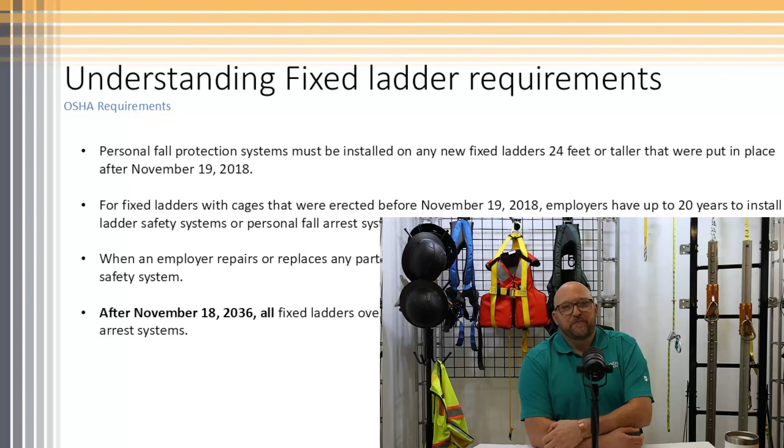So we'll go ahead and get started with ladder safety systems. So understanding the fixed ladder requirements is... well, Michael, could you make that a little bigger? Oh, yeah. Sorry. Having a little trouble seeing here.

Okay, there we go. So personal fall protection systems must be installed in any new fixed ladder that's 24 feet or taller, put in place after November 19th, 2018. Fixed ladders that have cages before that could still keep them on there, but you're given 20 years to install new systems. So what happened is that in 2018, OSHA came out and said all ladders 24 feet or higher have to have fall protection on them, and that fall protection is no longer a cage. It has to be a personal fall arrest system.

We offer several systems. We offer rail, in aluminum and stainless. We also offer cable systems in galvanized and stainless steel. We also do some random things where we put an anchor on there and put an SRL for shorter ladders.

Again, the standard calls out 24 feet. We obviously, as a fall protection company, realize that debilitating injuries start about 4 feet. General industry calls for 4 feet. Construction calls for 6 feet. So even though they're calling out 24 feet, we do recommend having them under 24 feet. Let's be honest, if you fall from 23 feet, it's still going to hurt.

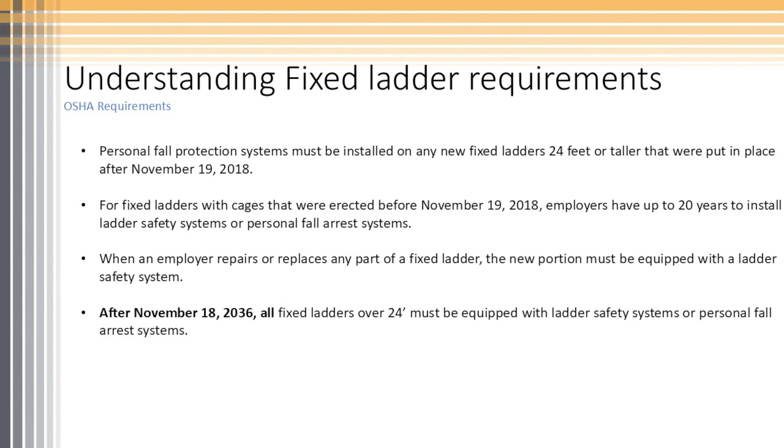This has caused a great deal of sales in our industry for people that are retrofitting and installing new ladders. So some of the places that we don't always think of for putting these in are shopping plazas, Home Depots, Lowe's, the gas station down on the corner. All these buildings are 30, 35 feet high, and almost all of them have HVAC on the roof. You have to go out and do maintenance. They're all flat roofs typically. Have to go out and make sure the drainage is working properly. So these are all opportunities to make sure that you have ladders in place, and we don't always think of them.

Other places where ladder safety systems are going to be required are manufacturing plants, mezzanine levels, access to machinery, warehouses. Oil and gas are huge, all oil derricks, offshore platforms, telecom towers, wastewater treatment plants. Obviously, there are construction sites, commercial buildings, but silos and farm and agriculture is one that I didn't think of for quite some time. But again, it's a fixed ladder over 24 feet. And if it's a commercial farm, then it needs to have fall protection on there. Municipalities with water tanks, filtration systems, elevated walkways. There's ladders everywhere we look.

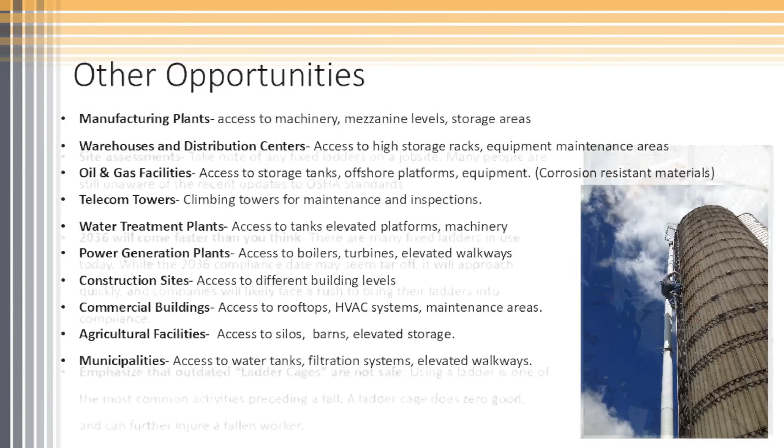Assessing the site, it's pretty easy. Take note of ladders that are on the job site or in the work area. A lot of people are still unaware of this updated standard. People that manage the Lowe's, that have the gas station, they may not be aware of it. They're not using fall protection on a daily basis, so it might not occur to them. So education is a big part of this updated standard.

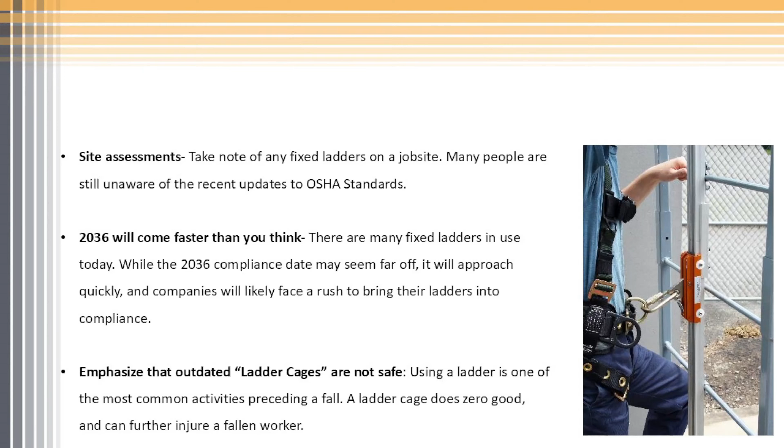We like to emphasize that the outdated ladder cages are not safe. They don't have to come off, but just using a cage does two things for you. Basically, it's going to tell you where you're going to fall, and it's going to beat you up on the way down. Ladder cages are not inherently safe.

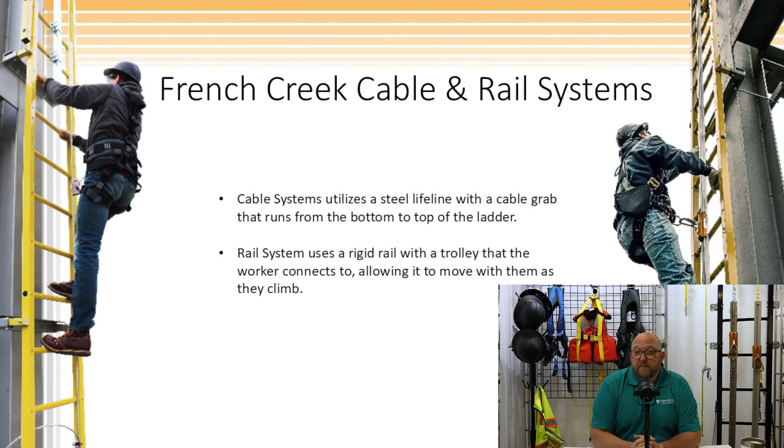So French Creek offers cable and rail systems, as I mentioned. Again, stainless steel and aluminum for the rail, galvanized and stainless for the cable systems. The cable system utilizes a steel lifeline and a cable grab that runs from the top of the rung down to the bottom. The bottom end is where the tension is. All the forces are generated through the top of the system.

Whereas the rail system starts about 3 feet off the ground and typically ends 6 to 12 inches above the top rung. It can be extended past the top rung further than that if you're using a side step platform. When using the rail system, you connect with a trolley. It moves up and down with you as you climb, and is typically a fairly smooth climb.

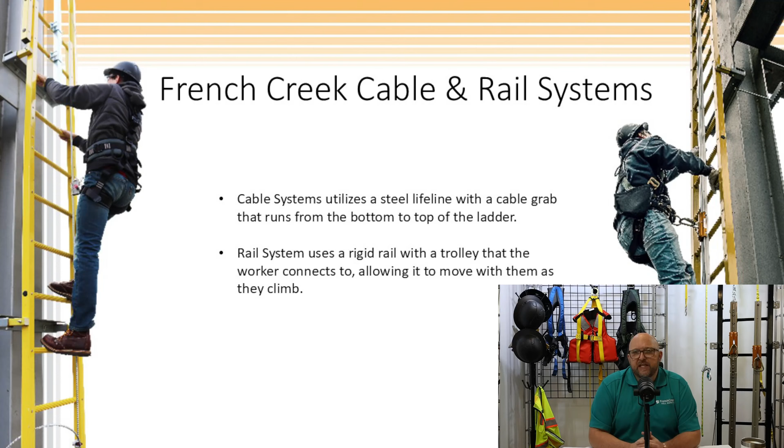The cable system has a little more flex in it, so it can be a little more challenging, I think, at times to climb, but both are very safe systems. The cable system, again, has a top bracket. That's where your forces are typically generated. Here we're showing it on an FRP ladder. We don't typically recommend it on that type of ladder, but it was a good photo opportunity.

The bottom bracket, again, has the tensioner on it. It has 3/8 galvanized wire rope, typically, unless you're using the stainless system. We provide you with the appropriate amount of cable guides. I believe we start about 30 feet, in the every 30 to 40 feet range. And what that does is just keep the cable in place when not in use.

The standard does say that you have to be able to traverse through that cable grab in a hands-free manner, which ours does. And then in the middle of the picture, at the bottom, you'll see our cable grab. It's a standard 3/8 stainless steel cable grab with a small shock absorber and a carabiner.

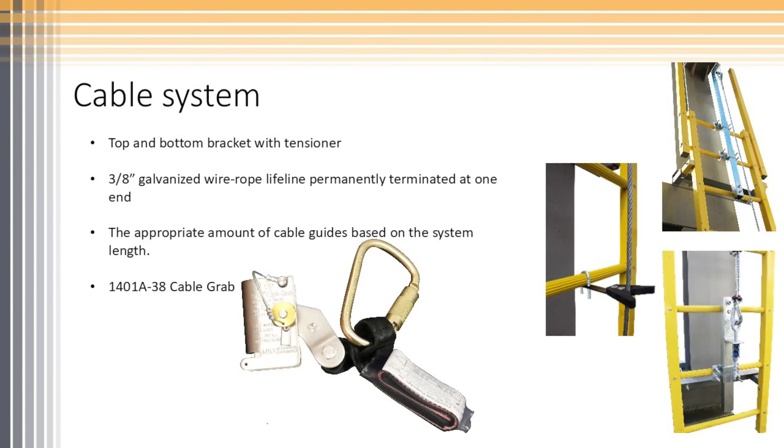Advantages to the cable system: it's a time-tested, very safe ladder system. Good mobility, especially when you're working in the middle of a fixed ladder. Initial costs can be a little bit lower, especially when you're looking at very long lengths, because you always have the top and bottom. The only difference is you're paying for a little bit of cable, which is one of the less expensive portions of that.

It's a very easy installation, 2 mounting brackets. The top connects to the top 3 rungs. The bottom connects to the bottom 2 rungs. It's very simple. Any competent maintenance man with a ratchet would have that put up in a very short time span.

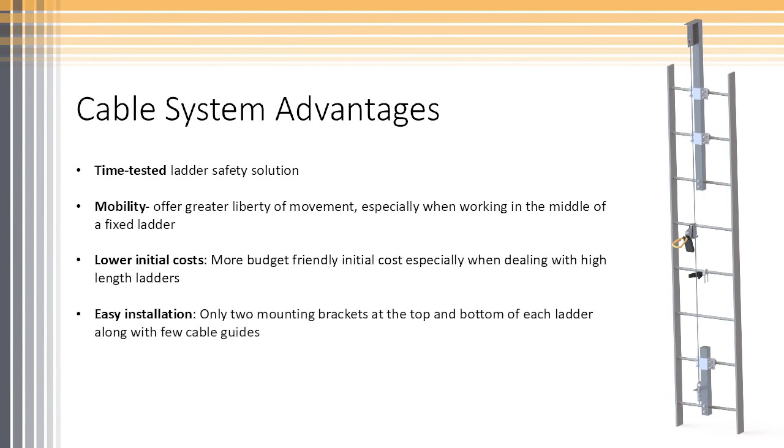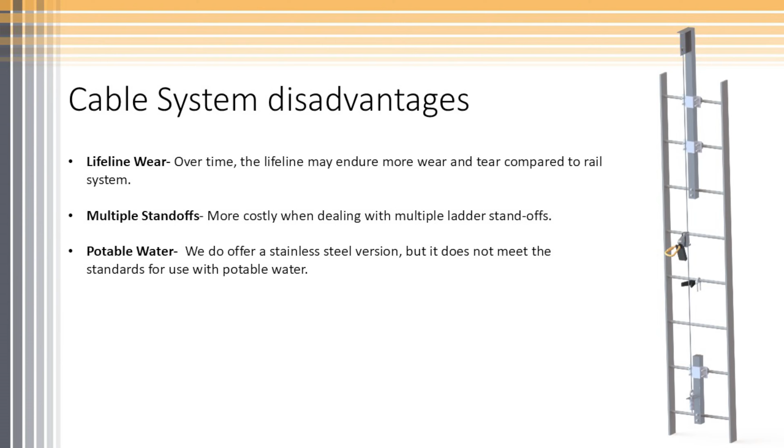Disadvantages to the cable system: the lifeline can wear over time. Now, I'll be perfectly honest with you. I've been in the industry for about 30 years, 16 at French Creek, and then 2 previous careers. I've never seen the cable lifeline wear out from typical use.

If the lifeline does wear and needs to be replaced, it's typically from it not being in its cable guides and it's damaged through wind beating against the building. Somebody clips it with a tow motor or things like that.

Another disadvantage is multiple standoffs. If I have to climb up a 25-foot ladder, get off on a platform, and go up another 25 feet, with most of your costs being in your brackets, it's typically quite expensive. So in that case, multiple standoffs, we would probably recommend rail.

And then potable water. We do offer a stainless steel version, but it's typically 18-8 or 304 stainless, which does not meet standards for potable water, which call out a 316 stainless steel.

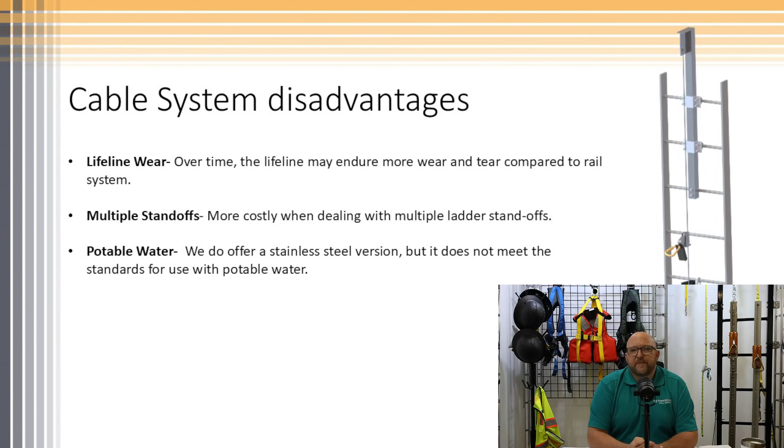The rigid rail system or track system is secured to a fixed ladder, typically every 4.5 to 6 feet. The trolley travels with the worker as they ascend or descend, immediately locking up in case there's a fall.

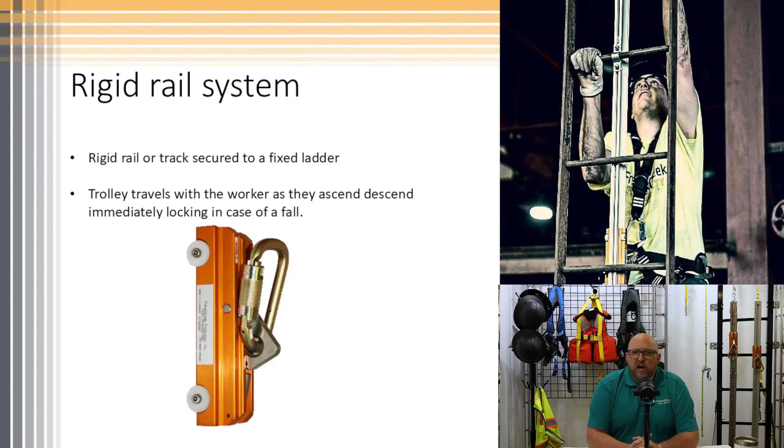The rail system components: the rail is typically, as I've mentioned, aluminum, which we can have anodized or non-anodized, which is just a mill finish. The anodization process doesn't really strengthen it or add any additional corrosion resistance. It just makes it look a bit more uniform in its finish. But we do sell mainly anodized.

The stainless steel, again, is the most expensive option we have in all of our ladder systems. But again, it's a 316 stainless and meets all the potable water standards. Also good in the food service industry.

Can we back up? Sorry.

The trolley, we have 2 versions. We have one for aluminum and one that will work on the stainless steel and the aluminum. They're both aluminum bodied, anodized aluminum. Rung clamps, those are the portion that fits around the rung and bolts to the rail itself.

And then there's a splice channel. Typically with aluminum rail, it comes in 20-foot sections. And this just helps the transition of the trolley as we're going from piece to piece, and also strengthens the entire system.

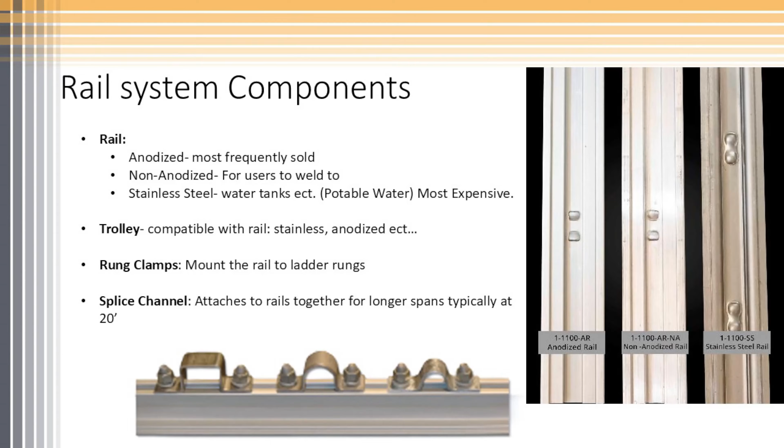The stainless steel system comes in 8-foot sections with a splice every 8 feet. Advantages to the rail: the stability, just having it rigid, reduces any risks of accidents. It's anywhere we're dealing with outdoor settings, high winds, bad weather.

Again, this is a very simple system to install. I would say any competent maintenance man can install it very simply. I've installed several of these systems myself, and I am not a competent maintenance man, I'll be very honest with you. So if I can do it, pretty much anybody can do it.

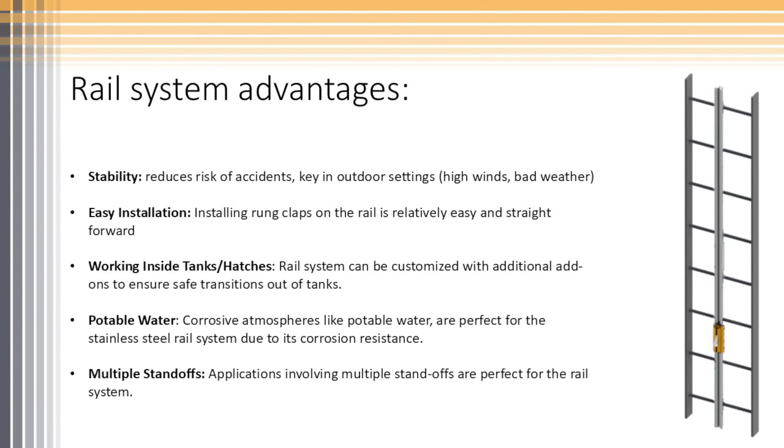So working inside the tanks and hatches, the rail system is more advantageous because it allows a hatch to open or close. And we have options for you to traverse outside of the hatch. Whereas the cable system has to stick up approximately 42 inches above the top rung, so it can keep your hatch from closing. Again, we offer the stainless for potable water.

The disadvantages are the initial costs are a little more expensive, and on longer runs, the cable is a bit cheaper. I'll be very honest with you. If I was climbing even a great length, I like the usability of the rigid rail system. I also like the fact that I can lean back into it, work hands free if necessary. It just gives me a more secure feeling.

As you know, I don't climb every day, so I like having something there that's holding me up, where the cable flexes and gives me that queasy roller coastery feeling.

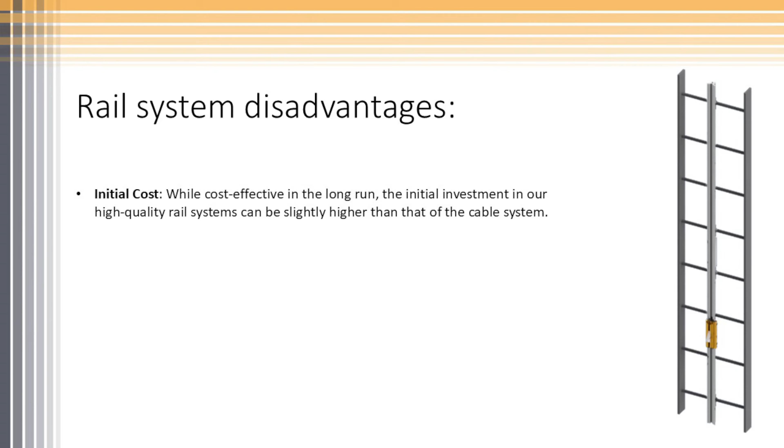Just reviewing some of the cable versus rail systems. Again, we talked about the multiple standoffs. The rail is more effective there. It also can be used in potable water. The cable systems are kind of the opposite. They're better on longer systems like radio towers, single spans, oil derricks, places where you're climbing a great distance. Unfortunately, it's not usable for potable water.

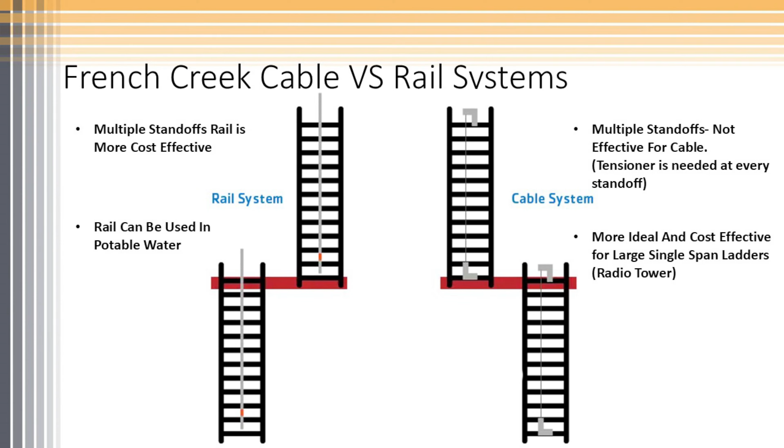So if you were on top of a roof and needed to go down through a hatch onto a ladder, we have a sleeve that would bolt to the ladder. You'd have that same AP36 without the U-bolts in it. Open the hatch, reach in safely, put it into the receiver sleeve. Then you could hook a lanyard or small SRL to the AP36, climb down onto the ladder where you could then hook to your trolley, disconnect from the AP36 and descend down the ladder.

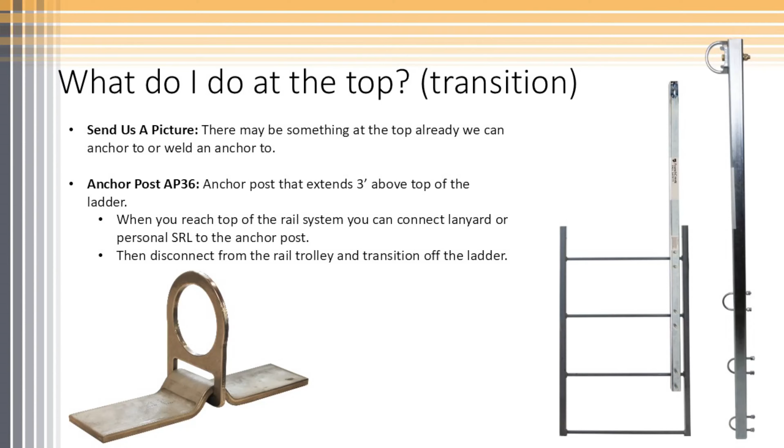We also offer a transition out of a hatch. If I was climbing up and had to go out onto a roof, the Apex system is a retractable counterbalance post with a continuous action spring. So it's one-handed: you pull a pin, lift a cam, push it up one-handed while you're safely still connected to the ladder system, holding on with your other hand. It goes up, you lock it in place with a pin and put the cam back down.

You're then hooked with your lanyard. You can disconnect from the ladder system and traverse through the hatch safely onto the roof. Now, this is a two-post system. Two posts, so you have equal handholds crawling through the hatch. It also provides two anchor points. If I was transitioning from the ladder onto the roof and I became incapacitated, the other post could be used for a rescue anchor point.

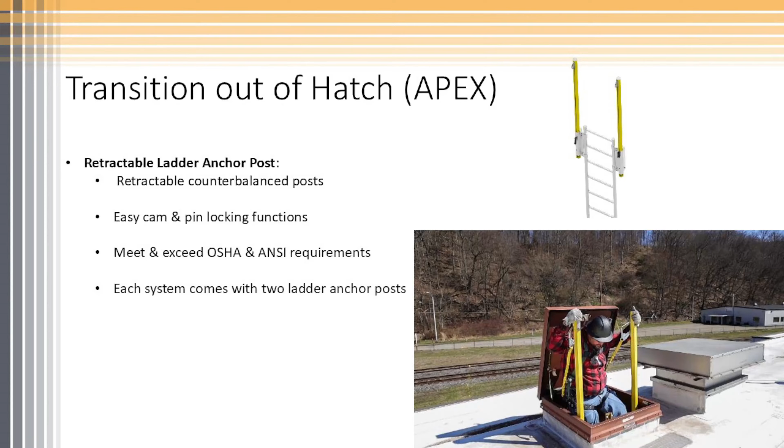One of the things that I like about this system is just the ease of use. It's a 5,000-pound anchor point that meets or exceeds all OSHA and ANSI requirements for anchors and ladder posts. Some of our competitors out there have a grab post that's not an anchor. We used to have an anchor that wasn't a grab post. It's since been discontinued and replaced with this, which I feel is a much, much safer system.

In order to get you a quote, we can provide you with a rail or cable order form. Basically, it asks you some simple questions. But realistically, what we need is the length of your ladder system for cable. It fits on almost any rung up to 1 1/8 inch round.

With the rail system, we do have a few more items we need. We need the size and shape of your ladder rung, the length of your ladder, how you're transitioning at the top. Are we going onto a platform? Are we going through a hatch? Things of that nature.

But again, we've developed a form for each of these systems that asks you a few guided questions, and you send that off to us. We can get you a quote within an hour or so. Very quick, very simple. We've had a lot of success with our customers learning the system a little easier, and it's also prevented ordering errors where we give you the wrong size rung clamp or shape or something of that nature.

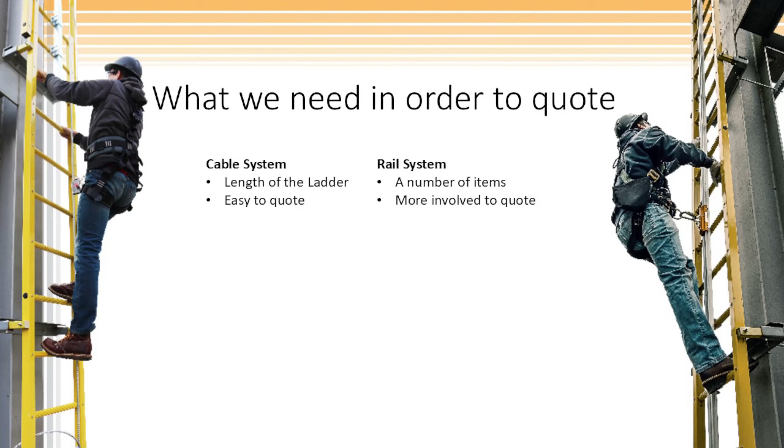So again, for quoting the rail, measuring your ladder, from the bottom or the ground platform, we recommend going 3 feet up. And then we'd measure from 3 feet up to the top of the next ladder. We also need to know your ladder rung spacing. Typically, most ladders are 12-inch on center for rungs. We do quite a few that are 11-inch on center. We also do a whole lot of odd spacings. So we can accommodate most ladders.

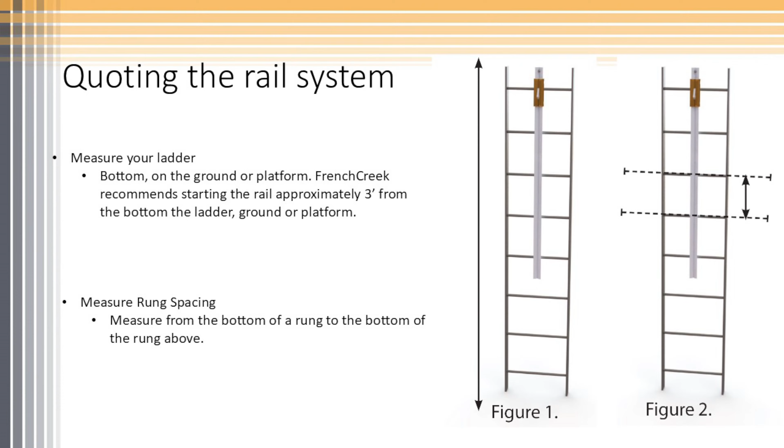This is the next step. One of the most important is making sure that we get you the right size and shape of mounting hardware. Typically, 1 1/4 inch round is our most common, followed by 1 inch and 3/4. Numbers like 6, 7, 9 rebar. I know it's typical rebar sizes a lot of guys are making ladders out of, but we do a lot of half round.

We do square. Some angle iron. Diamond number 5 is very popular, and we do even get some Supermans. But there's a lot out there that are actually pre-manufactured ladder rungs that have the anti-slip version. We can customize. We have some custom rung clamps that will fit, and there's very few ladders we can't come up with a solution for. So just let us know the size and shape of your ladder rung.

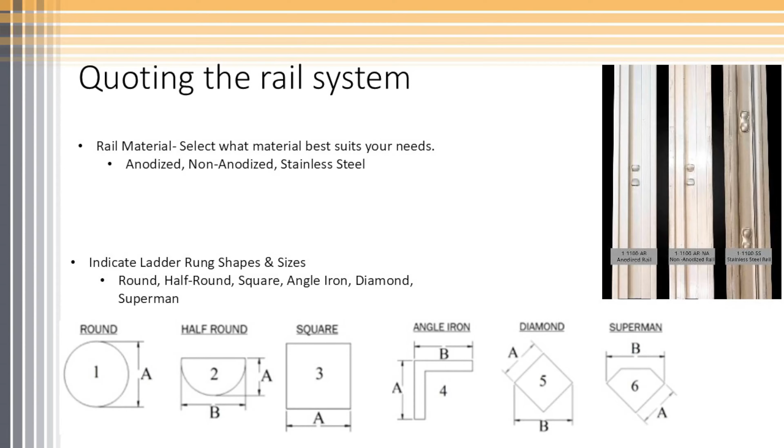Compatible harnesses, lanyards, and SRLs. Some of our competitors have you using a harness with a sternal D-ring. Our system works best with a waist D. Not that it can't work with a sternal, but we recommend a waist D-ring. We find that it gives you a more relaxed, natural climbing position. The trolley travels better when you're at your waist.

You don't have to push your chest out away from the ladder to disengage the brake ball and have the trolley move. If you're connected at your waist, typically you kind of climb with knees bent, your butt's out away from the ladder, and that disengages the brake ball and allows you to traverse up or down in a much more natural position.

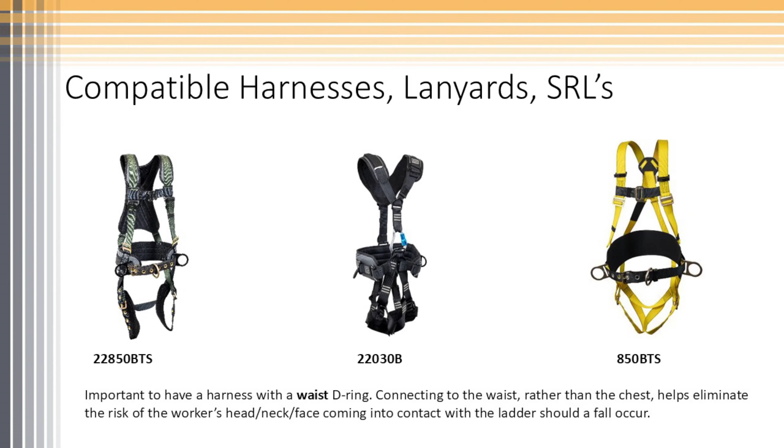Lanyards. So lanyards are typically used with a ladder system when you're transitioning from the ladder to wherever you're going to be working, either onto the tank, onto the platform. So we offer a multitude of options, and that'll mainly depend on how you're anchoring. So we have single legs with standard snap hooks, dual legs with stretchable legs, so it's not a trip hazard, that have rebar hooks. And we're also using a lot of the smaller personal SRLs now.

So either a single or a dual leg version with or without rebar hooks. But we also offer them in aluminum carabiners, aluminum snaps. So there are a variety of options depending on what you need to transition and what you're anchoring to.

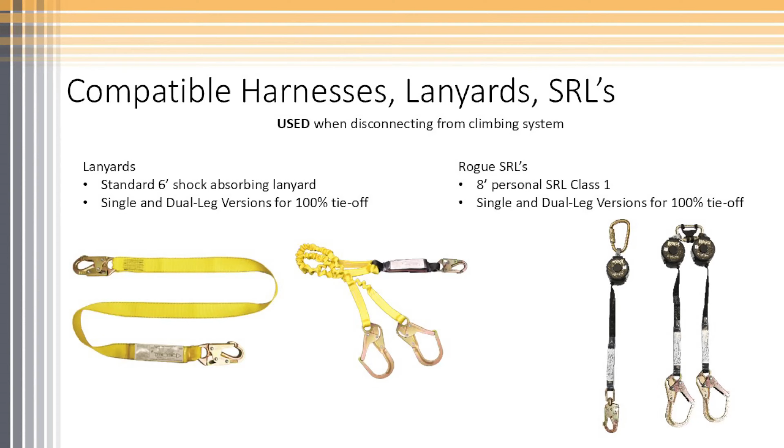Some non-fall protection type of devices, ladder safety accessories: we do offer a remote tie-off pole. A lot of times, especially in older tanks, they won't start the ladder until it's about 6 feet off the ground. And how do I go up there and connect to that safely? We've developed a remote tie-off access pole where I could reach up with a pole extension, much like a painter's pole,

clip onto the ladder with a snap hook, have a retractable and a tag line connected to that. I could pull that down, hook it to my harness, then use a portable ladder to get up the 6 feet and connect to the ladder safety system.